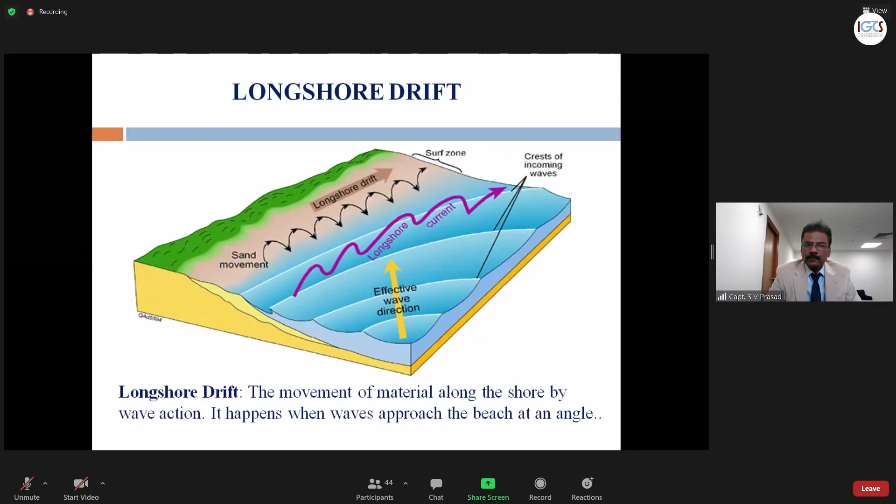This reaction takes place, like deposition on the southern side and erosion on the northern side. This is the reaction of the longshore drift, the lateral drift, at a few locations of the Indian coast due to man-made constructions, which we can't do away with since they are required for coastal development.

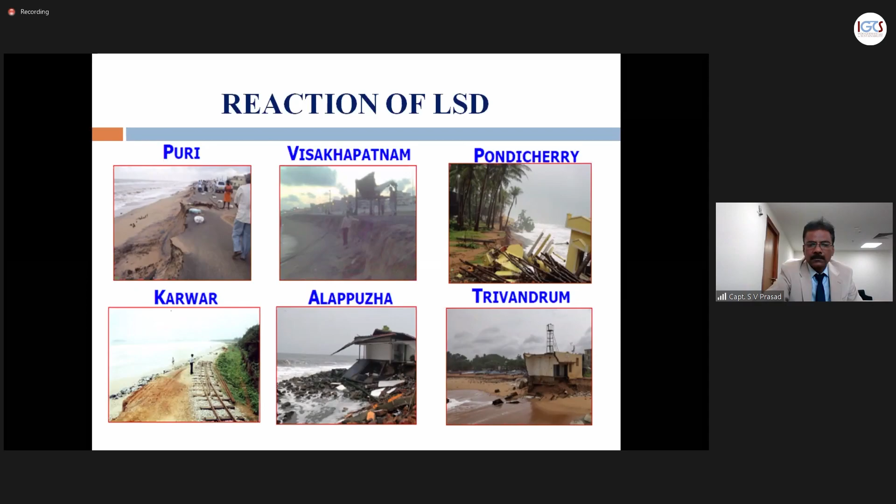And to protect these shores, there are various methods like beach revetments, sea walls, groynes, offshore breakwaters, and beach nourishment.

On some parts of the east coast, revetments, sea walls, and groynes are constructed to prevent beaches from erosion, on the northern side of constructions or ports. You can find these groynes north of Chennai and somewhere in Gopalpur, and sea walls also somewhere north of Chennai. Revetments you can find somewhere near Tuticorin.

Beach nourishment is carried out just to replenish the sand being eroded, by pumping the sand either by the rainbowing technique or by pumping ashore or other means. This is being done at present on the Indian coast at Visakhapatnam beach. There is a small case study on Visakhapatnam dredging that we will discuss at the end.

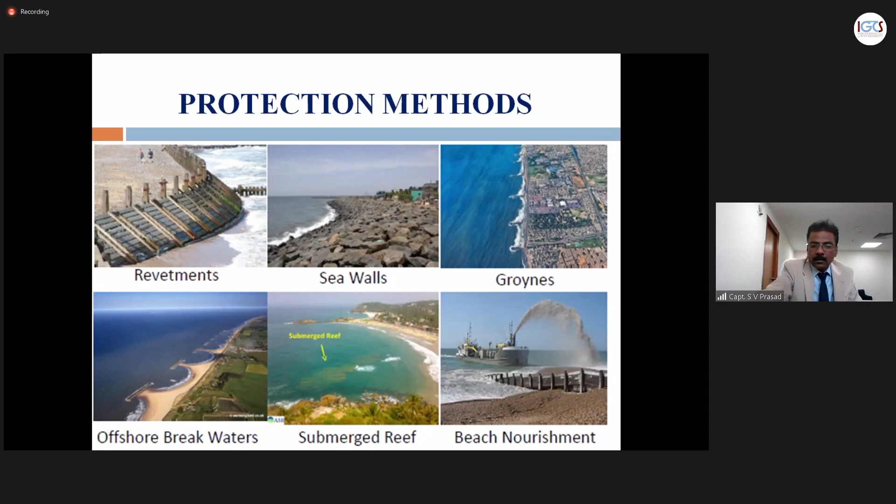Now, having discussed the reasons for deposition, siltation, and the dredging requirements, now to the dredging to be carried out, and what equipment is required to carry it out.

There are various types of dredgers, basically divided into mechanical dredgers and hydraulic dredgers. Mechanical dredgers are primitive equipment, very old type dredgers. Hydraulic dredgers came later, with developments in technology.

But still, we can't do away with this primitive equipment of mechanical dredgers because they are required for certain areas of dredging, like tackling some nooks and corners and very stiff materials in small quantities, where hydraulic dredgers cannot be deployed. Production levels of mechanical dredgers are very poor when compared to hydraulic dredgers.

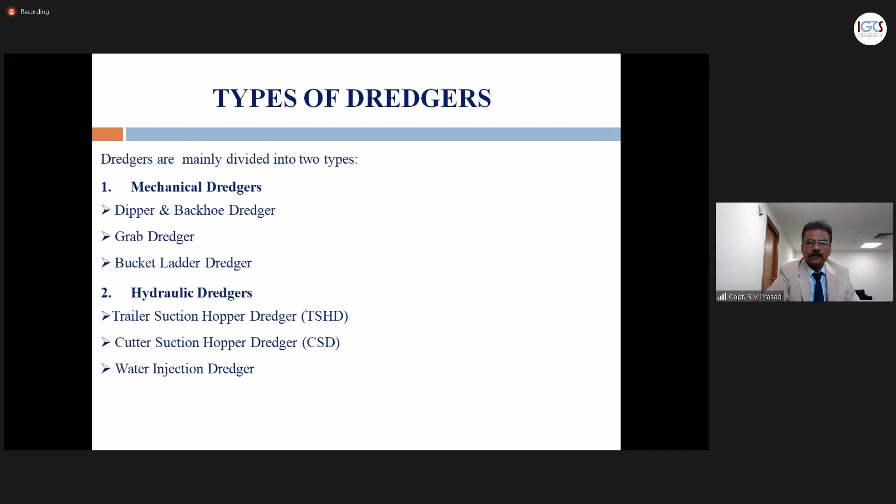We'll just have a look at the different types of dredgers. This is a typical backhoe dredger. An excavator is mounted on a pontoon, and it is a simple dredger. With the scooping effect, the material is picked up and loaded onto a barge, which is not shown here.

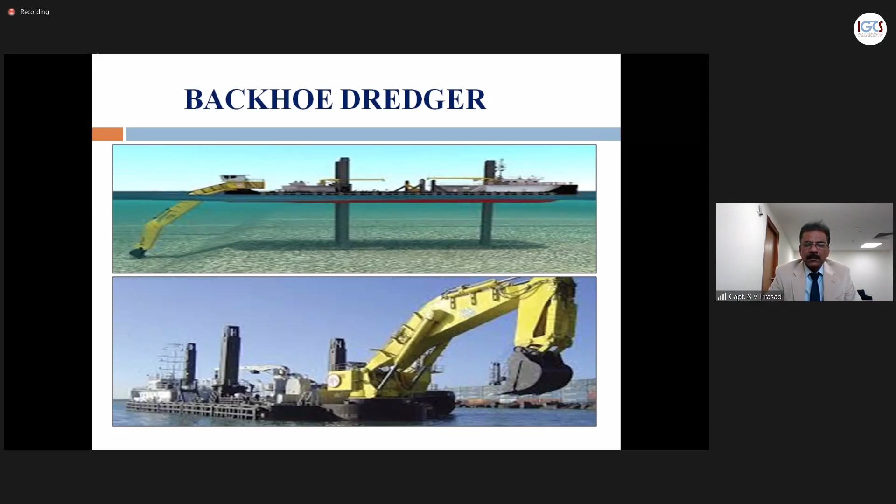And the barge is filled up, and the barge travels to the desired disposal ground and dumps the material, depending on the requirement. This dredger operates on 3 spuds, and some of the dredgers can move on their own with thrusters for positioning in the dredging location.

And this is a grab dredger, which operates on a similar principle to the backhoe, but it can tackle higher depths than the backhoe. The backhoe has limitations on depth, depending on the length of its boom. Grab dredgers are not self-sufficient to carry the material, so they require barges to transport it.

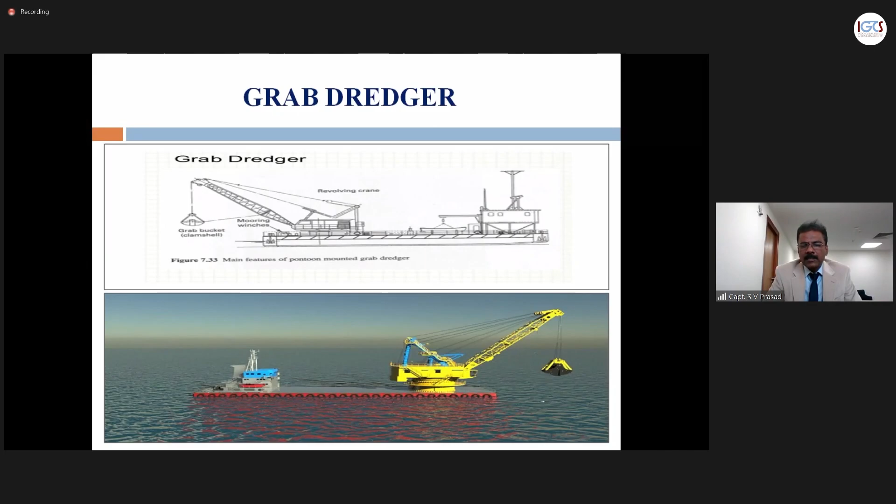And this is another primitive equipment, the bucket dredger, a very old type of dredger. A chain of buckets is lowered into the seabed, and material is scooped by the buckets, lifted and transferred to the barge, and transported to the dumping location by the barges. These bucket dredgers have become almost obsolete now.

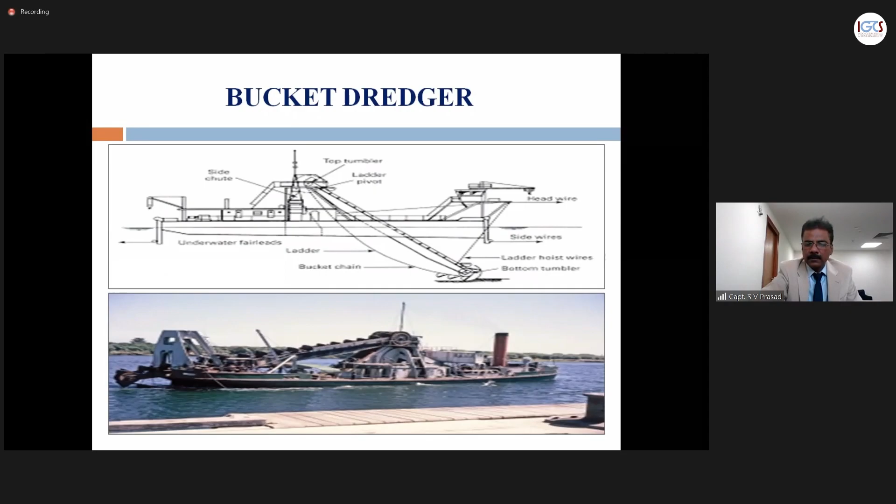Now coming to hydraulic dredgers. These are the dredgers of the day, trailing suction hopper dredgers. At present they range from a minimum of about 400 cubic meters hopper size to now 45,000 cubic meters hopper size. Dredging is normally carried out by trailing, by moving ahead.

The basic design of the dredger is that material is sucked by a centrifugal pump and stored in the tank called the hopper. The suction pipe is lowered onto the seabed, and the drag head connected at the end is dragged on the seabed so that material is sucked through the centrifugal pump and stored in the hopper. Then, after completion of dredging, after achieving maximum production for that load, they proceed to either dumping or other disposal depending on the requirement.

There are other sorts of disposal, like rainbowing or shore pumping, by connecting a pipeline at the forward location.

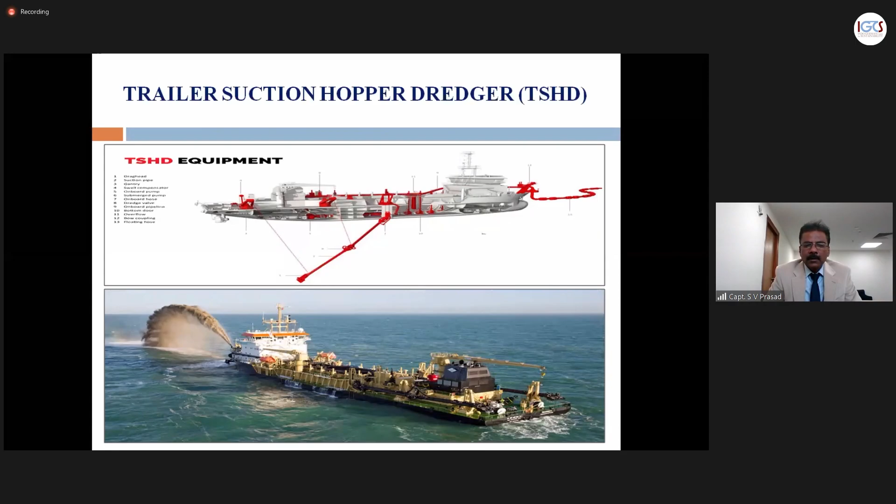This is the TSHD dredging process. The trailing pipes are lowered onto the seabed and dredge the material, which loads into the hopper. Then the dredger sails towards the dumping ground or disposal location, where they connect the pipeline and dispose of the material through the pipeline, for either beach nourishment or land reclamation, etc., or they may carry out rainbowing. This is the process of dredging, called one cycle.

Then coming to the other hydraulic dredger, the cutter suction dredger, normally used for capital dredging purposes, for creation of ports, for creation of new berths, or for deepening or widening of existing channels.

Where TSHDs are not successful, even though the depths are available for deepening and widening the channels, the material cannot be handled with the TSHD. CSDs can be used.

The CSDs have two spuds for positioning and anchoring at the forward end for dredging operation. There is a cutter ladder at the end. The cutter is lowered onto the seabed, which cuts the material, and the material is sucked by the centrifugal pump, which is positioned on the ladder itself so that it will have a better suction effect, and pumps it ashore. The pumping capacity again depends on the type of equipment, type of dredger, and all that. So this is the basic principle of a cutter suction dredger, normally used for capital dredging purposes.

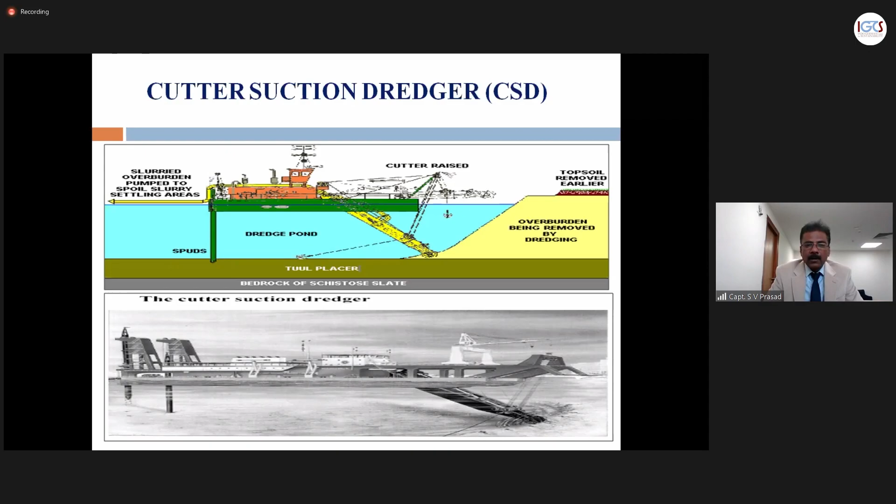The water injection dredger is the latest invention from a few years back. This is only an ancillary craft for achieving even depths over the seabed after dredging by TSHDs. It works on the principle that a high volume of water is injected at very low pressure onto the seabed. This is most efficient in areas where the sediments are light in nature and currents are prominent. This high volume of water makes the material float and get carried away with the currents. It is possible to achieve even depths all over the channel for smooth completion of the projects. On the Indian West Coast, water injection dredgers are more useful.

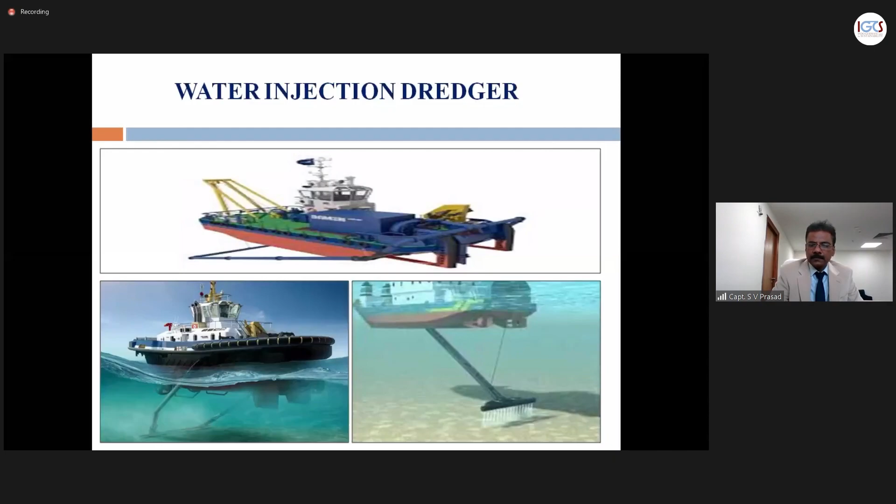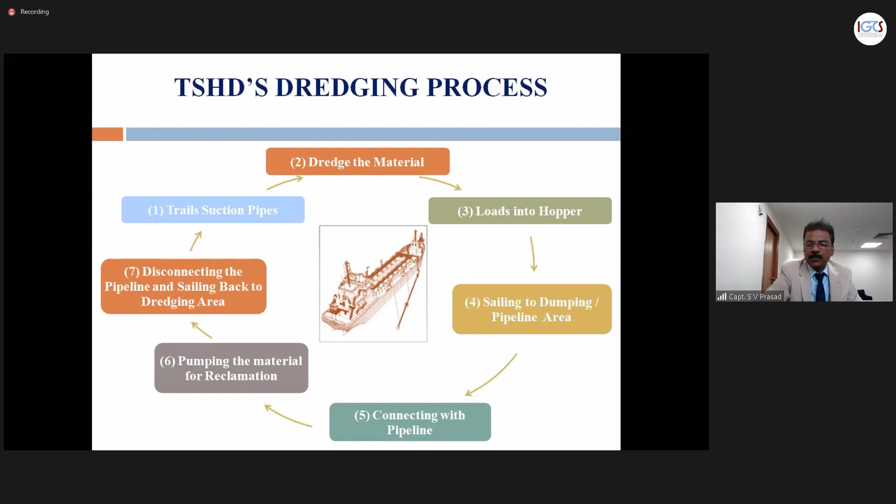As I've explained, this is the TSHD dredging process, one cycle, and the CSD dredging process. They lower the cutter head onto the seabed, loosen the material, and transport it through the suction mouth to the pump and then to the shore through a pipeline.

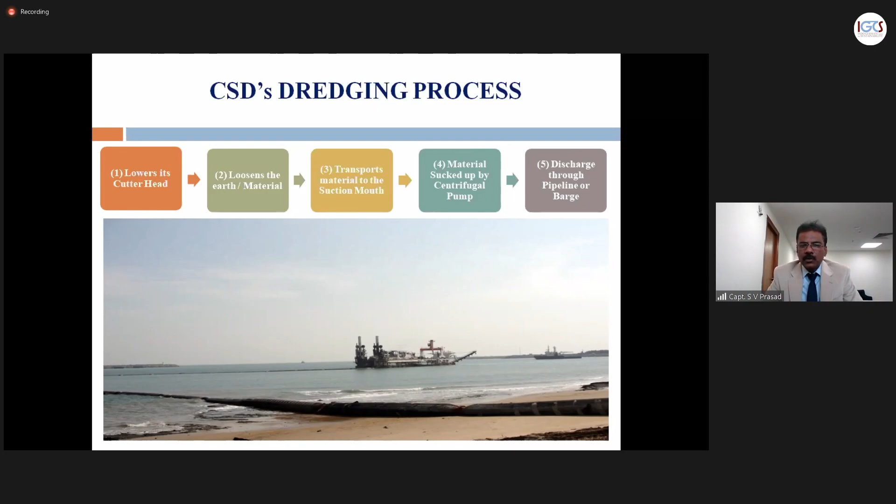Now, there are different modes of disposal of dredged material. The simple disposal is sea dumping. For trailing suction dredgers, the material is stored in the hopper and transported to designated and marked disposal locations. The bottom doors are opened and the entire material is dumped at the designated locations.

Then there are other disposal techniques like rainbowing and reclamation at reclamation sites for raising the levels—this is a typical reclamation site. For small mechanical dredgers, which cannot carry material on their own, the material is loaded onto barges and shifted to the disposal locations. These are the various modes of disposal of dredged material.

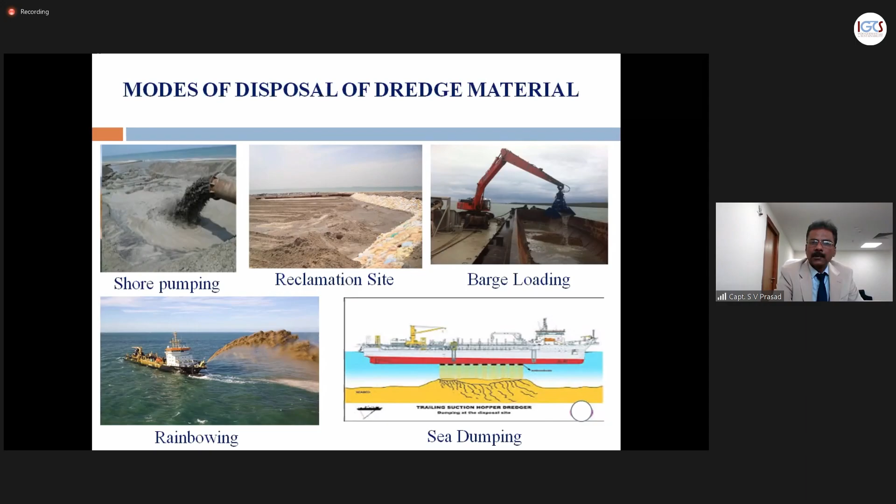So this is about dredging, the various types of dredgers, dredging equipment, disposal methods, and dredging requirements in India.

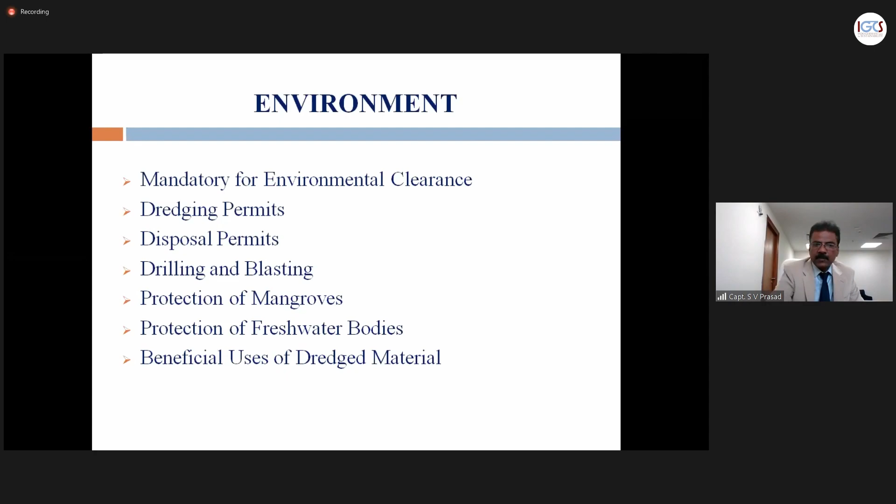I would like to touch upon the environment a little. For any capital dredging project, environmental clearance is required to proceed, with regard to the dredging location, disposal permissions, and basically whether the area is located near mangroves that need to be protected. Permission is not granted for capital dredging works in areas where mangroves or freshwater bodies need to be protected. Various permissions from the authorities need to be obtained to proceed with capital dredging projects.

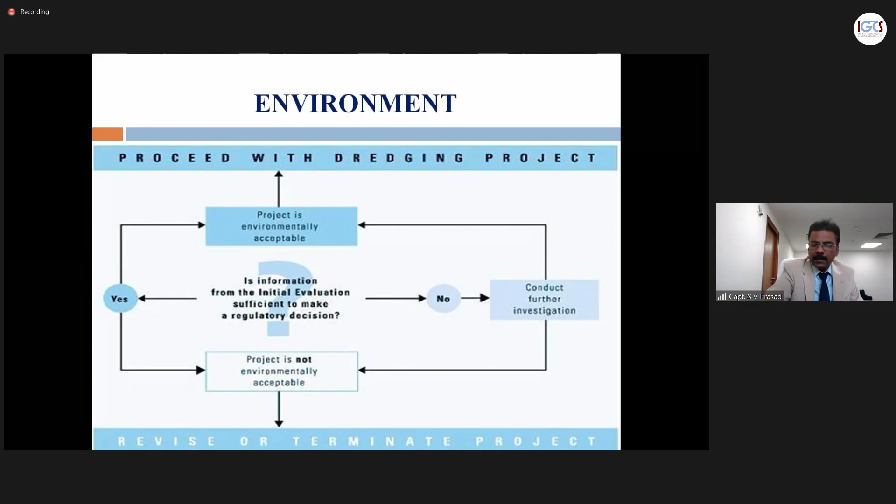The procedure we need to follow involves environmental clearance. There are 4 authorities in India which give environmental clearance for taking up capital dredging projects: the Ministry of Environment and Forest, the Ministry of Agriculture and Animal Husbandry, the Ministry of Shipping, and the Ministry of Defense. So we need to obtain environmental clearance before proceeding with the capital dredging project, and once clearance is obtained, we need to follow the guidelines issued to protect the environment.

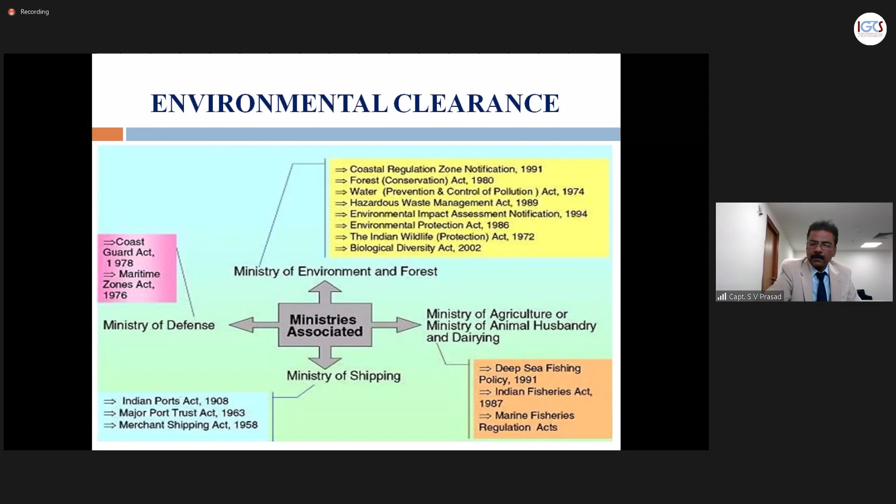Now, having discussed dredging over the Indian ports, let's come to shallow water dredging in India.

India has an extensive network of inland waterways in the form of rivers, canals, backwaters, and creeks, etc. We have about 14,500 kilometers of navigable stretch across 5 inland national waterways for water transport, which need to be maintained. The depths are less than 6 feet of water, and they need to be improved to facilitate inland water transport in the national waterways. Shallow water dredging is normally carried out by inland small cutter suction dredgers and amphibious dredgers, which can move on land as well as in water.

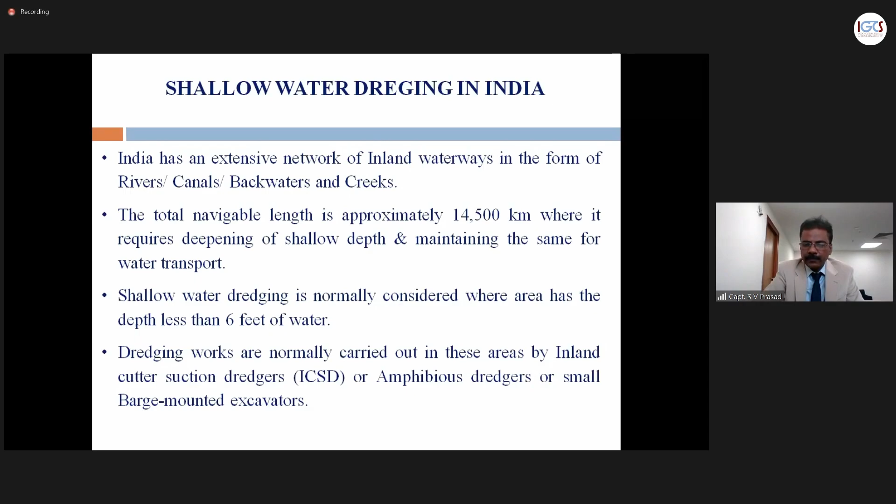The Government of India initially approved the concept of Sagarmala somewhere in 2015. The concept of Sagarmala is the integration of coastal development, shipping, ports, and inland water transport. This is to promote inland water transport and import-export to the hinterland. This is the main motto of Sagarmala—to improve connectivity between the ports, coastal shipping, and hinterland.

So for this, the national waterways have to be integrated and dredged for increasing the depths to facilitate transportation of cargo movement. The commercial aspect is not the only reason for improvement of depths in inland water transport.

As per available data, the water table is decreasing. So to protect or conserve the water table, these inland waterways, rivers, canals, and reservoirs need to be dredged so that the water table can be preserved. At the same time, commercial activities can be improved. That is the purpose of this project.

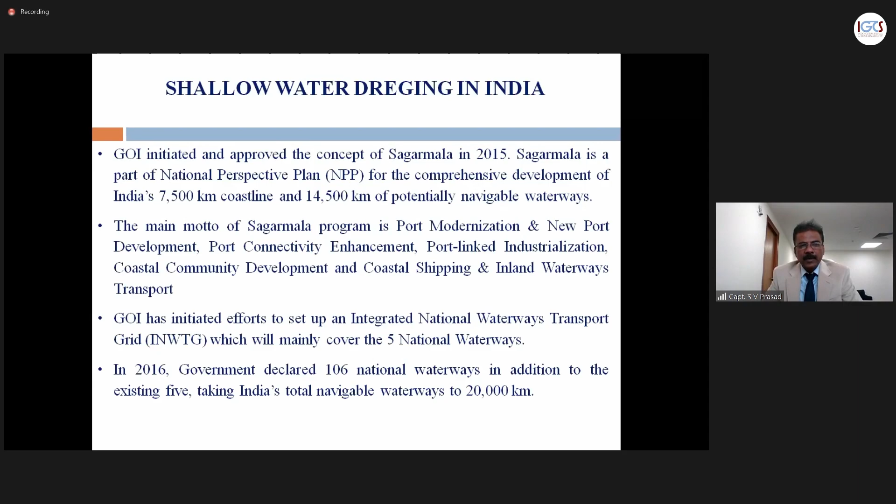This was initiated by the Government of India under the guidance of the Honorable Prime Minister and the Shipping Ministry. These are the 5 national waterways initially identified in India to facilitate inland water transport. The national waterways dredging and requirements are being looked after by the Inland Waterways Authority of India.

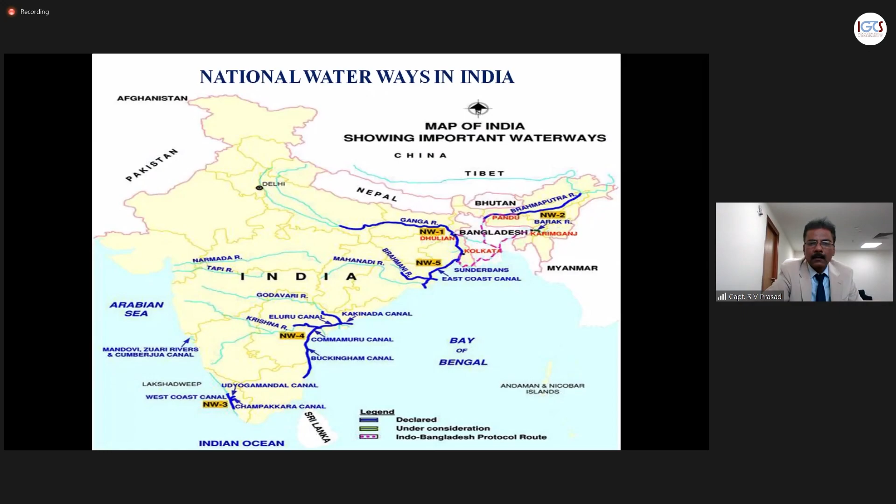This is National Waterway 1, covering the river Ganges, Bhagirathi, and Hooghly—part of the river Ganges. It has a stretch of about 1600 kilometers and joins the sea at Haldia.

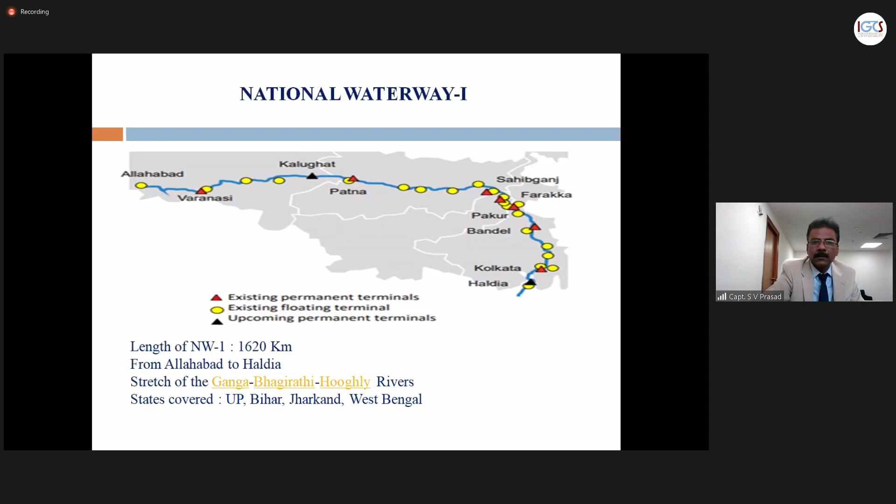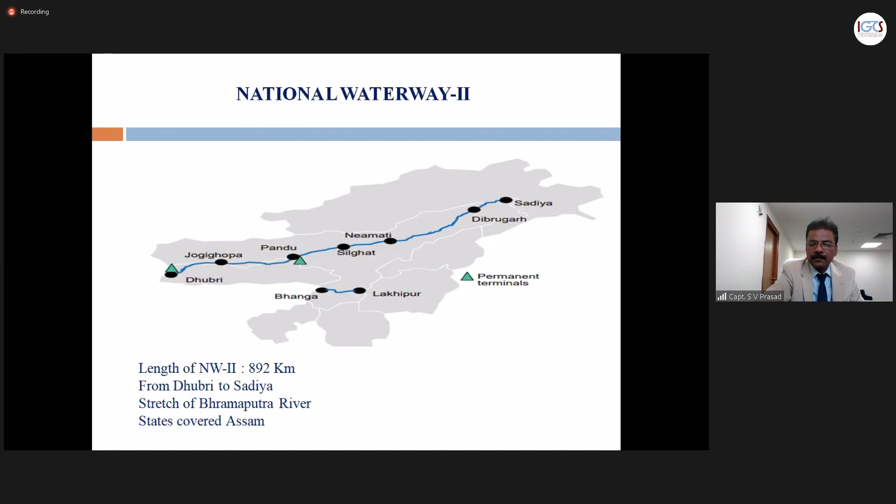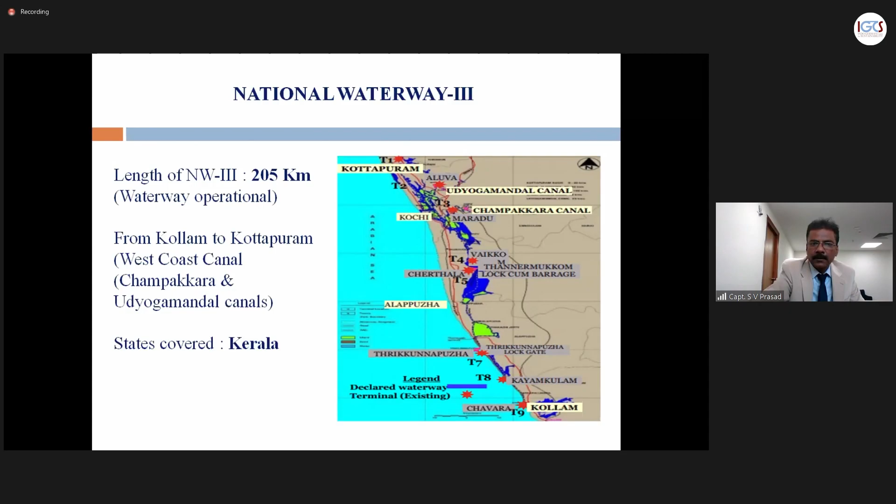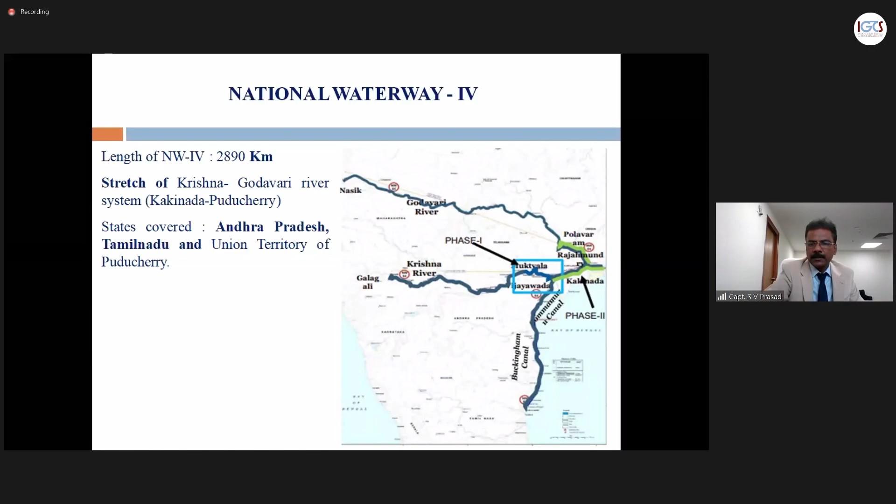The National Waterway 5 is in the state of Orissa.

The present traffic status on our national waterways is only 2%, when compared to road transport at 54%, rail transport at 33%, and other means at 11%. That is the main reason the Government of India is focusing on improvement of the national waterways.

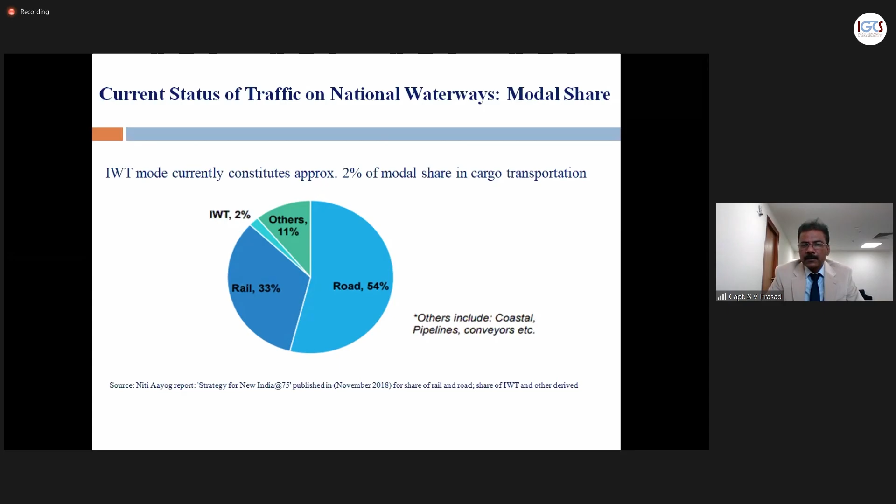The advantages and logistic benefits of using inland water transport are like this: an inland water transport vessel has a capacity of about 2,000 tons, which is equivalent to the load of 125 trucks on the road.

Coming to the operating cost, it is 0.3 times less than the railways and 1.2 times less than the roadways. So it is more efficient to carry cargo by inland water transport.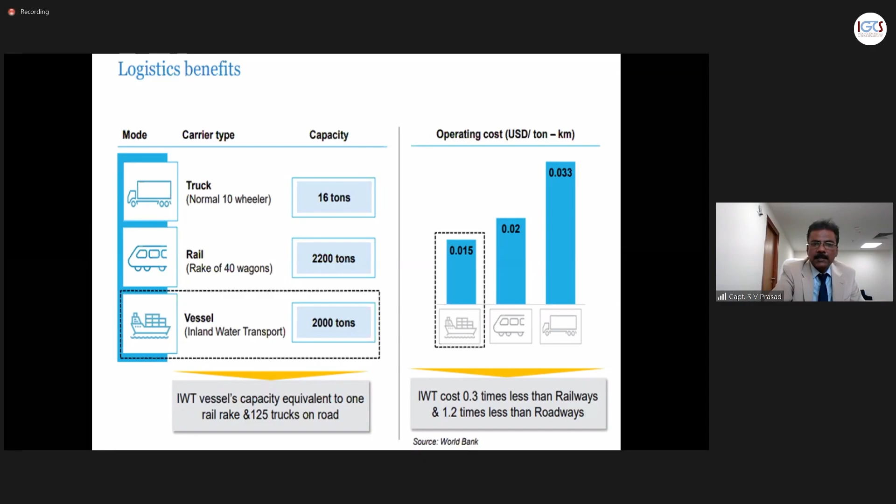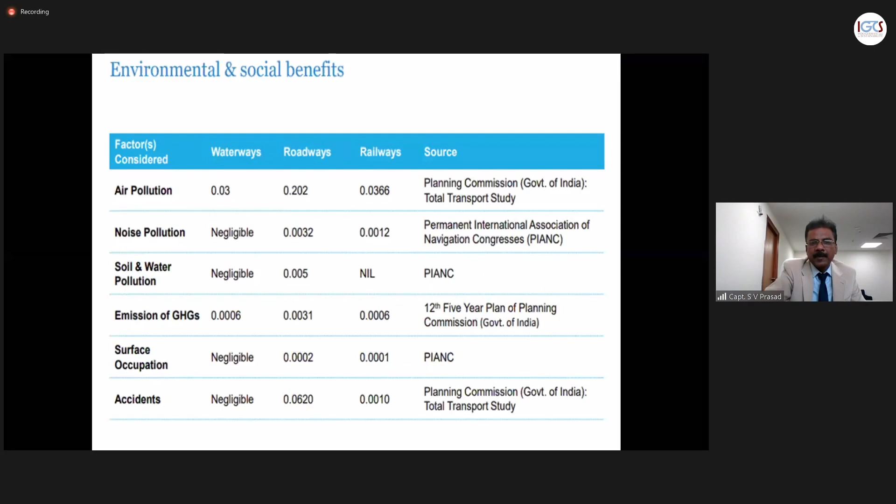With this, I complete my presentation. Then we have a small case study on dredging at the Kolkata port, where we have been carrying out dredging for many years. This is part of the National Waterway 1.

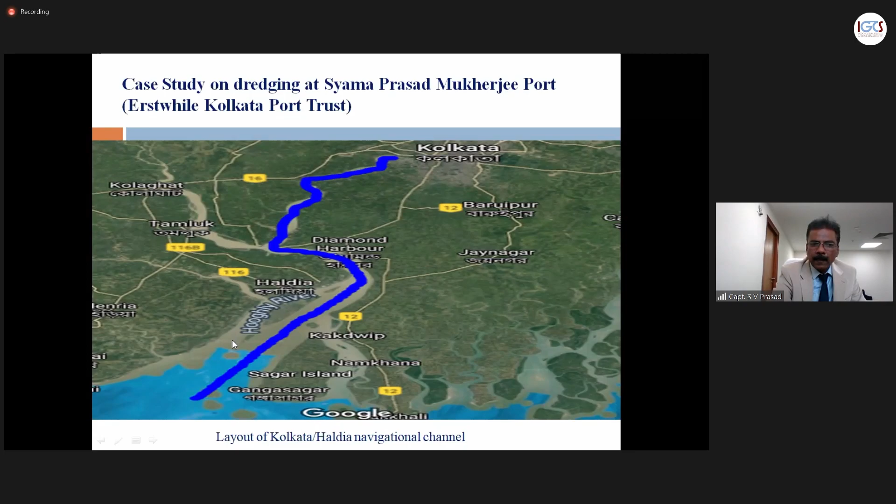Haldia port is located here, on the western part of the Hooghly River. This is the Hooghly River, a distributary of the river Ganges. Some part of the water is diverted towards the Haldia port and again joins the Kolkata channel down below, like here.

Some part of the water is diverted like this. Haldia port is here, and again it joins the Kolkata channel here, hitting the sea somewhere down below. Haldia port is the main revenue source for the northeast region and for transportation of cargo to the hinterland.

So what Kolkata Port authorities have done is carried out a lot of studies on this river. Morphology keeps changing every now and then, and sandbars keep shifting here and there. Though the channel is stabilized over a period of years, this Auckland channel, which is across the flow, was creating problems.

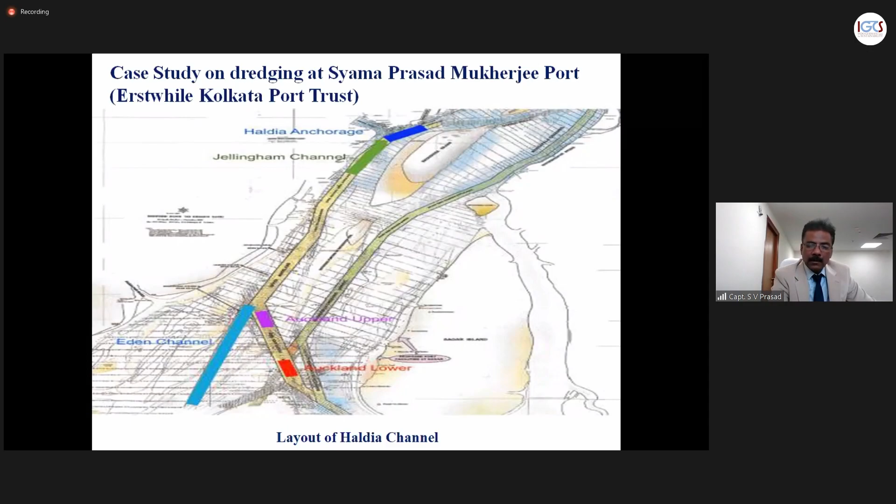this channel got opened up on its own and facilitated shipping through a different route to the Haldia port, with a separate route. So they need not use the Kolkata channel up to here; they can use a separate channel and enter into the Haldia port.

Because of this, we are able to maintain this Eden channel, and there is another dredging area, the Jellingham channel, with about 8 to 9 million cubic meters of dredging. So the dredging cost has been reduced by almost 50% with this development.

So these are all river regulatory methods that need to be adopted in taming the river, to ensure minimum expenditure on dredging.

But it is difficult to remove the material from the system in the rivers; it would need to be carried out over very long distances, which is not at all economically viable. So the material dredged is dumped nearby, here and there, in the deeper pockets, and some percentage again comes back into the system.

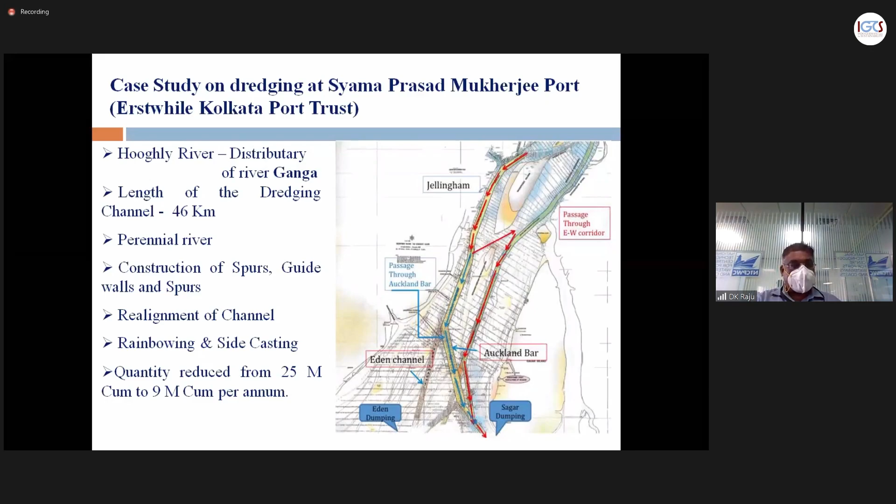There is another case study, as I explained, about the littoral drift and deposition on the southern side and erosion on the northern side. So to prevent beach erosion, the Visakhapatnam Port Trust carries out beach nourishment every year to ensure that whatever material is being eroded is replenished.

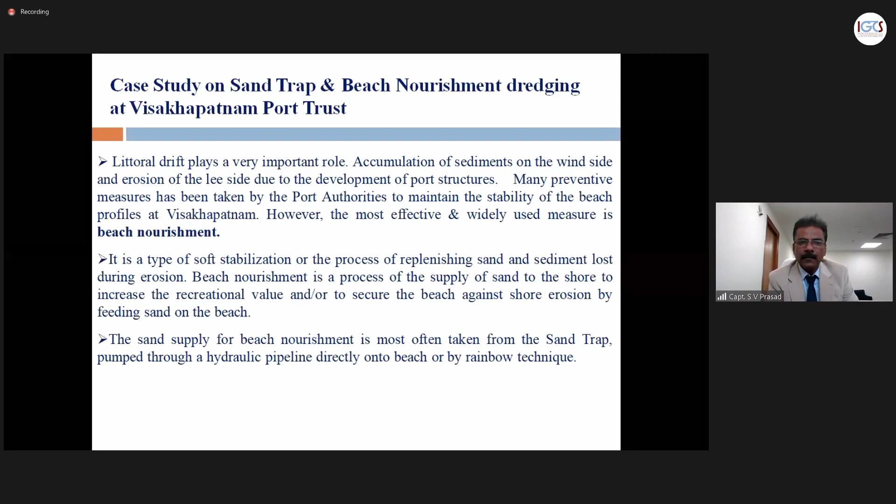I will show you some pictures. These are the pictures of erosion during the monsoon season. This is the Visakhapatnam beach. The beach is getting eroded due to the littoral drift during the monsoons. So what we do is...

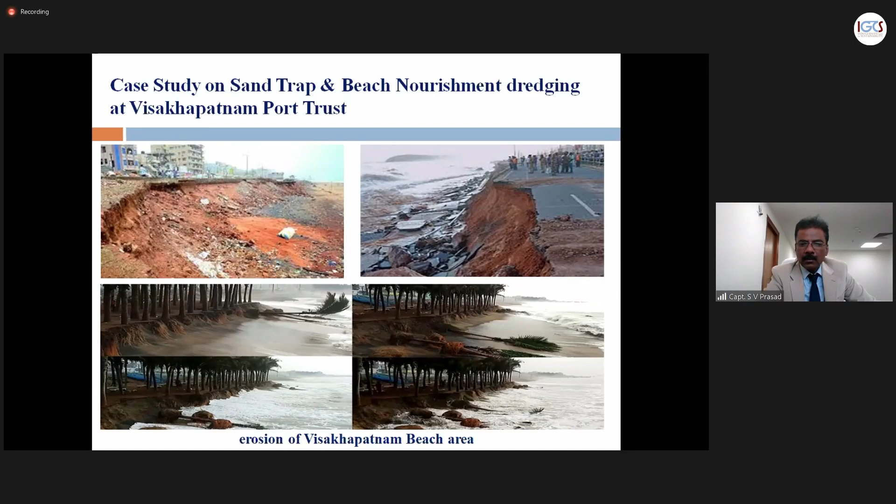That's why I was discussing about the 2% siltation in some of the ports, like in the southern part of the east coast. Sand pits are provided at Chennai Port Trust, Ennore Port, Visakhapatnam, Paradeep, and others. The siltation is reduced by providing sand traps outside the breakwater so that sediments carried by waves, natural causes, and littoral drift settle in the sand pits.

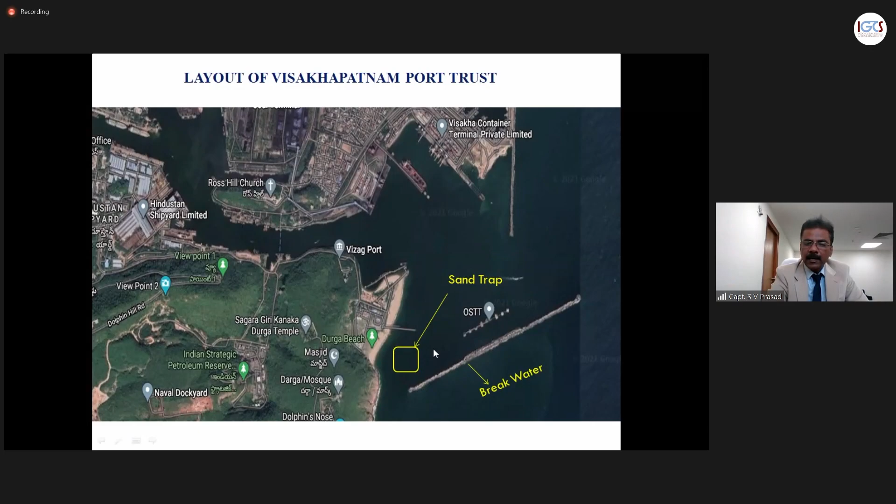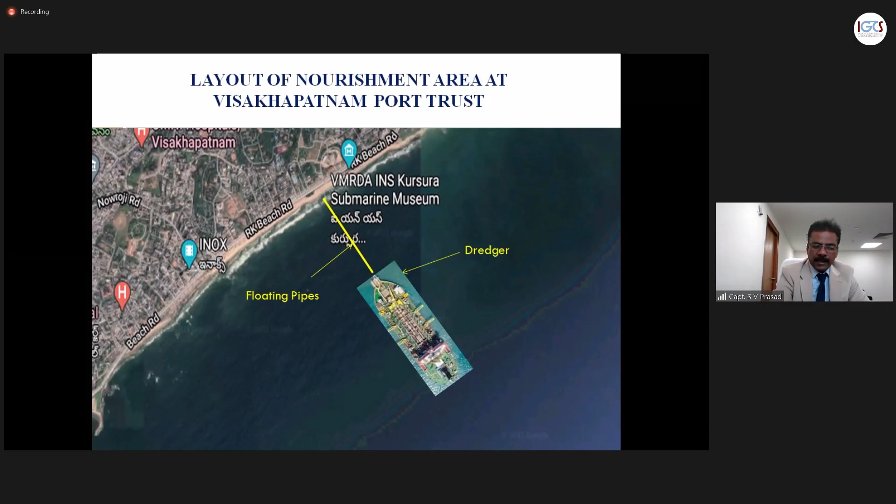This is dredged on a yearly basis and dumped so that siltation in the channel is minimized and dredging expenditure is minimized. So the sand trap is dredged and the material is carried to the beach, which is being eroded during monsoon due to lateral drift. That is replenished by pumping the material onto the beach.

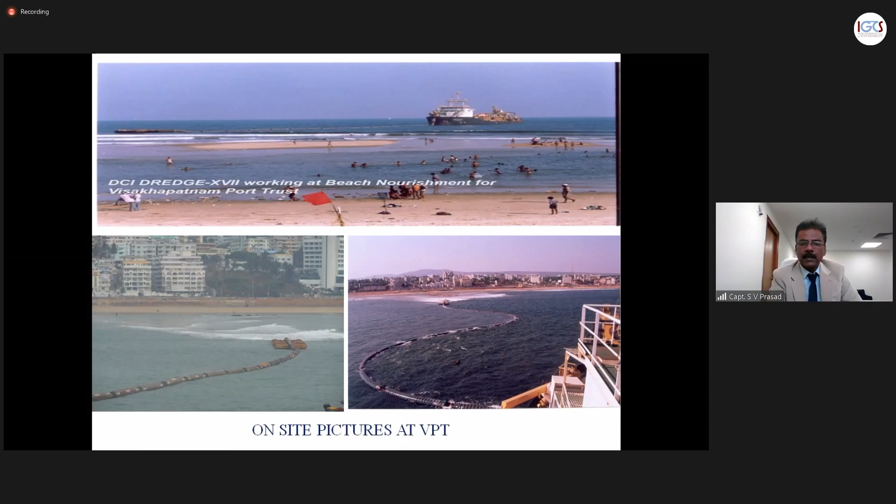So you can see the sandbars are created by pumping the material onto the beach, and the beach is protected like this. So this is another case study. With this, I close my presentation.

Thank you, Captain Prasad, for this excellent presentation. You covered almost all the components of dredging, right from the basics all the way to capital and maintenance dredging, as well as the case studies. The case studies were very self-explanatory, and the participants might have understood the full physics and mechanism involved in dredging.